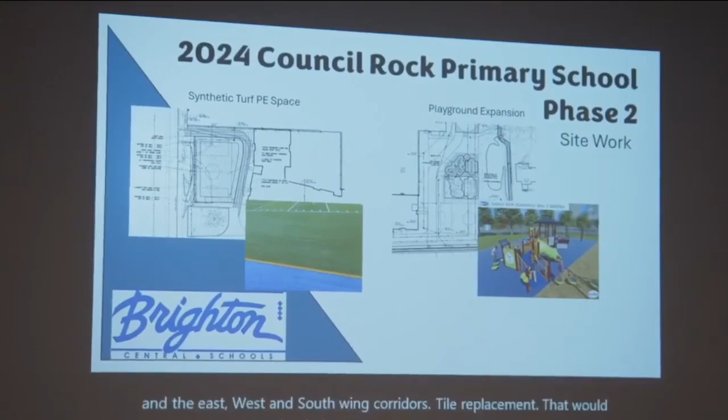Site work. We looked at this project in 2017, if you can believe it, and there's an opportunity to improve the site. We had conversations with Principal Tappan and discussed opportunities for expanding play areas outside.

So outdoor synthetic turf on the lower west side. It might be challenging to see where the building is, but that floor plan is the addition from the 2017 phase 1 capital project.

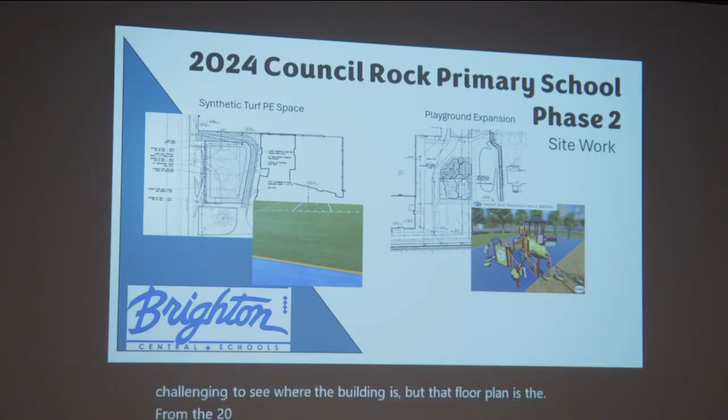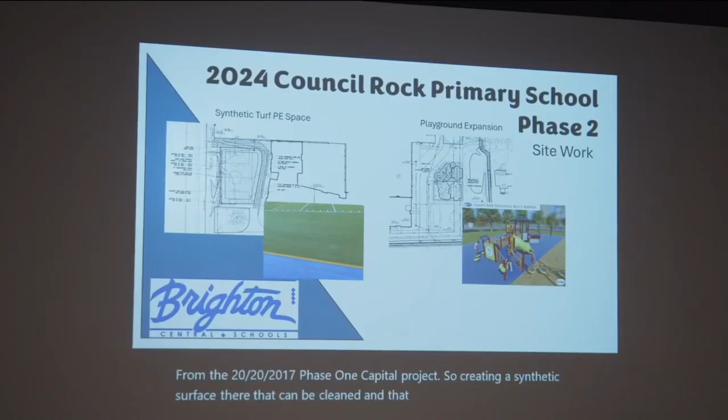Creating a synthetic surface there that can be cleaned allows exterior play to happen into later months of the year. It also creates a safer area where the surface is significantly smoother. On the east side, the southeast side of the building, you can see the expansion.

Just north of the play area that was provided in the 2017 phase 1 project, this capital project will expand that area with a rubber surface and also accessible play equipment.

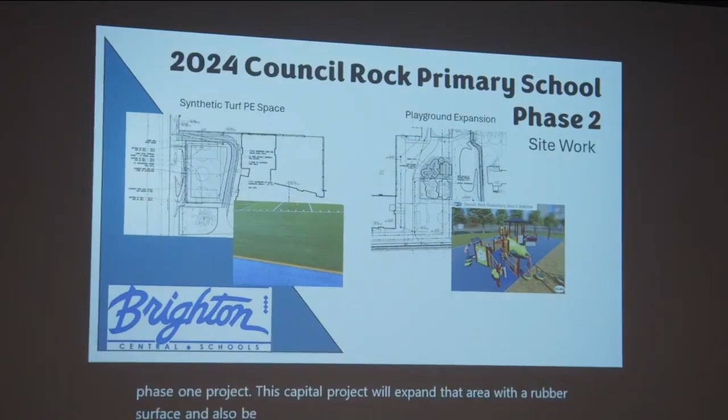Minor roofing in this project. Most of the roofing was done in the 2017 phase 1 project. So the northwest section and the area over the art room -- you can see that's the art room right there, so it's a lighter shade.

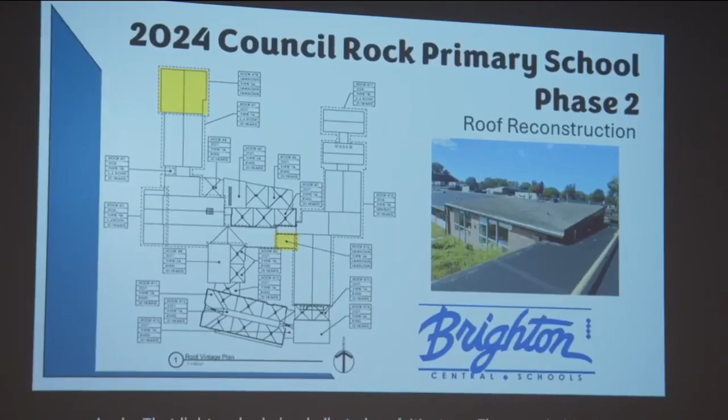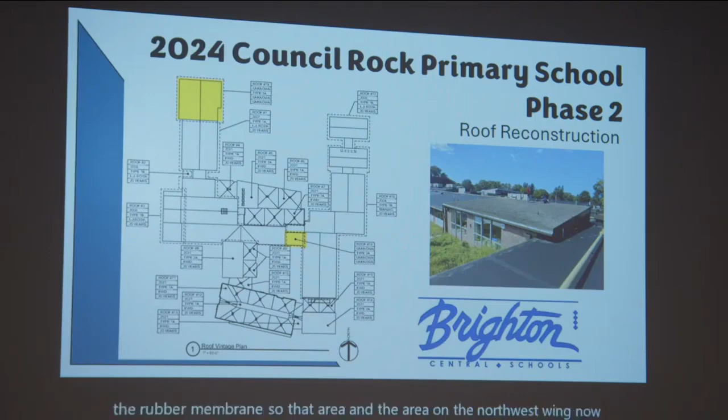That lighter shade is a ballasted roof. It's stone -- the stone holds down the rubber membrane. So that area and the area on the northwest wing will be replaced with similar surface, the rubber or EPDM membrane roofing that the rest of the building has.

Looking at making consistent instructional space. In 2017, the addition and other areas within and adjacent to it were updated and provided with flexible learning. So there's an opportunity to provide consistent and equitable classroom spaces for the remaining 31 classrooms in the northwest, northeast, and south -- considered the west, east, and south wings.

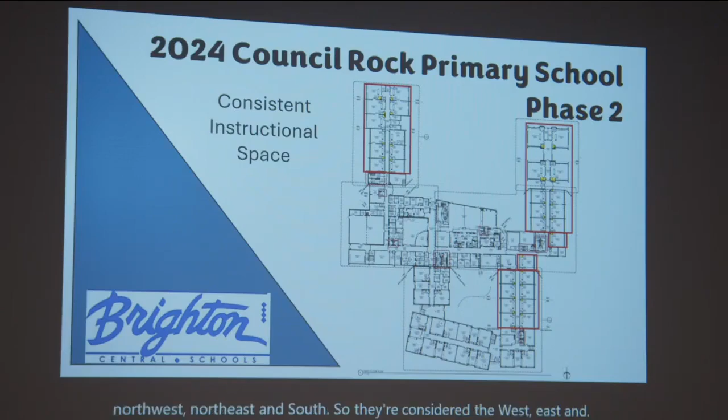Looking at opportunities for furring out the walls or creating space for technology to run without conduit. As Larry mentioned, increasing opportunity for electronic devices to be plugged in, upgrading the electrical in these areas, upgrading the toilet rooms as they exist in their existing footprint. There may be an opportunity to provide some accessible toilet rooms in the northeast wing or the east wing, as we refer to it.

So the flooring, walls, and lighting will all be replaced. Phase 1 did the mechanical or HVAC -- the heating, cooling, and also the fire suppression or sprinkler system for safety.

Our schedule and design: we've been in pre-referendum, and we'll be going to a referendum vote December 4th. At that time, when the vote passes, we would conduct the first of 3 design phases -- schematic design, then design development for 4 months, and then the construction document phase for the following 3 months, anticipating SED submission in September of next year, 2025.